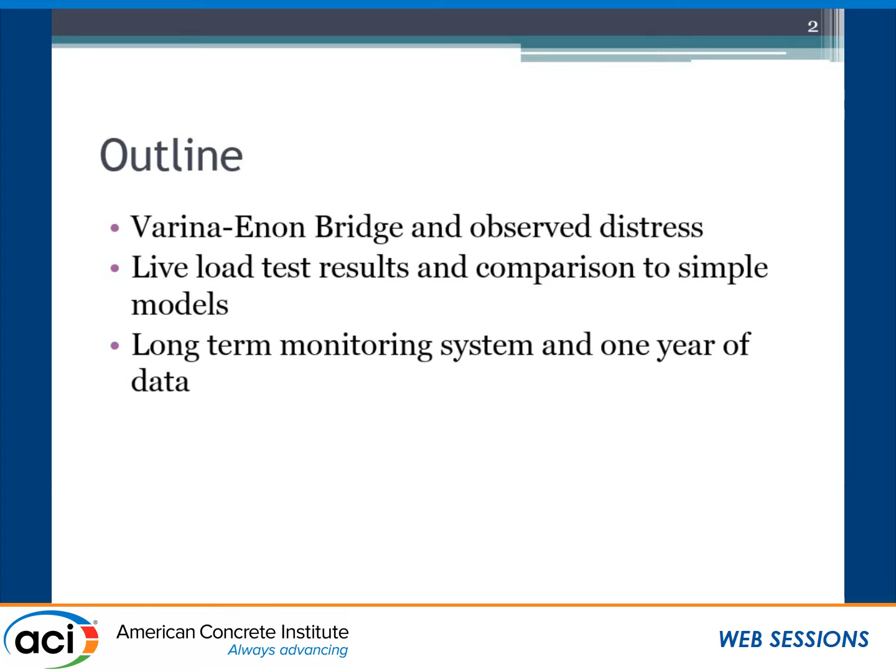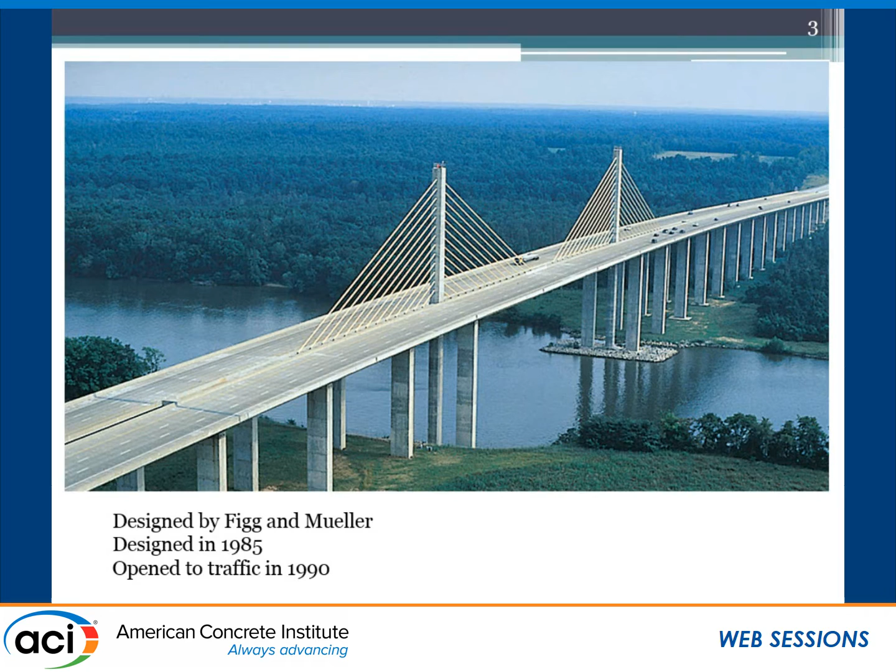So this is the Varina Enon Bridge. The main spans are a cable-stayed structure. The approaches are span-by-span constructed segmental box girder units. It was designed by, at the time, Figg and Mueller back in 1985, and it was open to traffic in 1990. The area of interest of our research was actually the approach structure.

This is on the northbound side of the bridge, the southernmost approach unit. It has 6 150-foot spans, erected using span-by-span techniques with exclusively external post-tensioning.

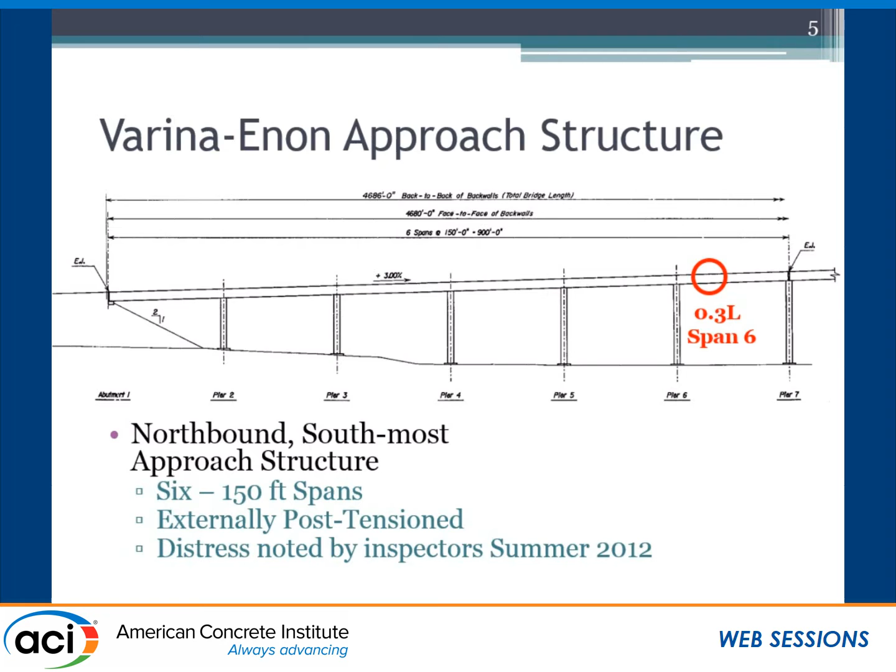The distress was noted by inspectors during a routine but detailed inspection in the summer of 2012. One location where they saw this distress was in span 6, about 3/10 of the span length away from the first interior pier. What they saw was that the joint between segment 2 and segment 3 in that span was opening under traffic. By their visual estimate, they reported it was opening 1/16 of an inch repeatedly under traffic loads.

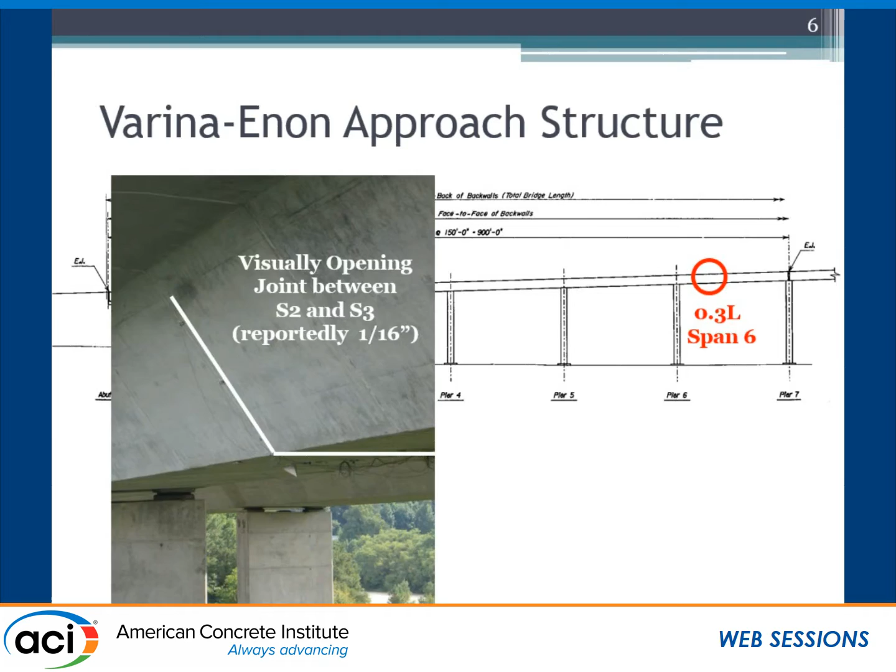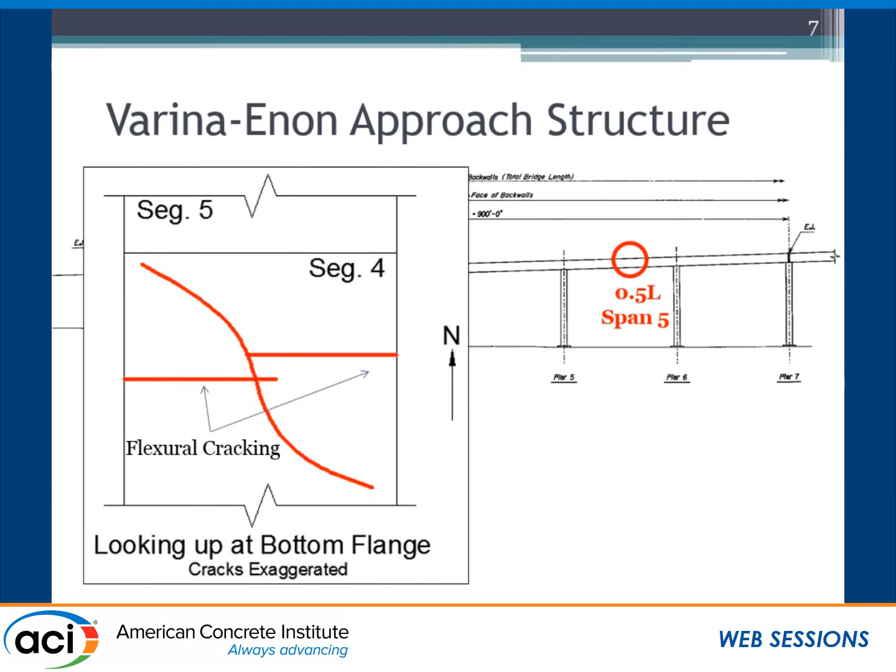There was also some distress noted in span 5, near the midspan in segment 4, and this distress was actually within the segment rather than at a joint. They noted flexural cracking and also a diagonal crack across the bottom. This led to us having discussions with VDOT to do some live load testing.

They had also hired Parsons Brinckerhoff to do some more detailed analysis of the structure to determine if this was really a major problem, an anomaly, or what was going on.

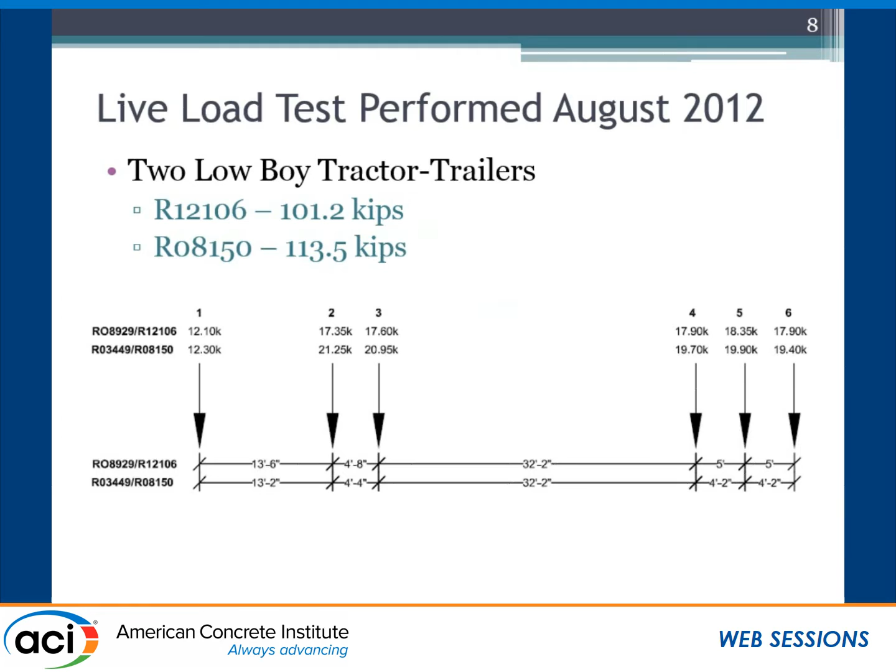Our testing was done with 2 lowboy tractor trailers, one weighing about 101 kips, the other about 114, and both had closely spaced rear axles around 60 kips.

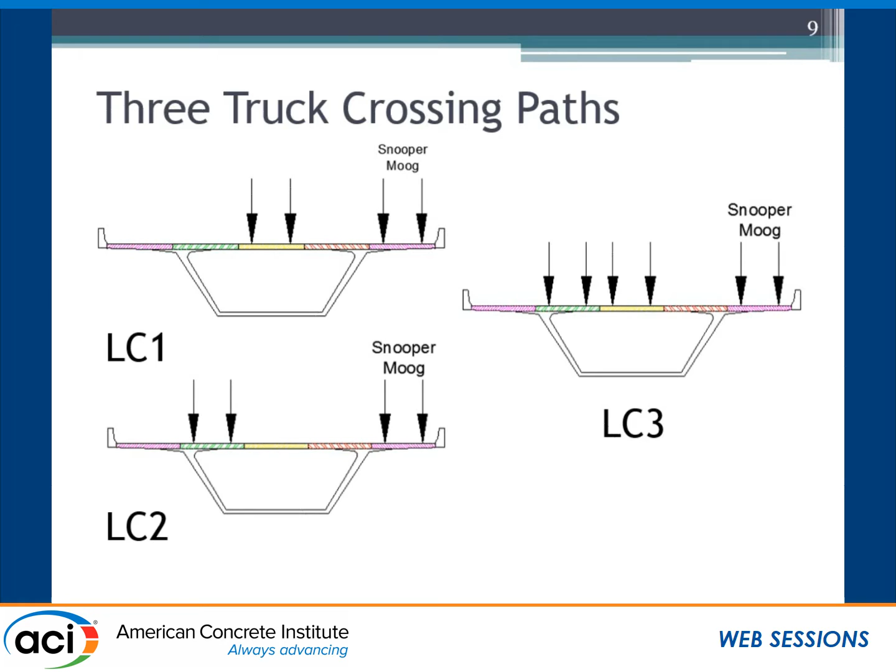We laid out some truck crossing paths. We had the shoulder and the right lane closed to traffic for our equipment and work. We had 2 trucks parked on the shoulder, a snooper and a moog, to help us place our instrumentation. For the truck crossings, one we rolled the trucks right across the center lane, one we rolled a single truck across the left lane, and then the third load case we rolled the trucks side by side in the adjacent lanes. To determine if our data made any sense, we did a very simplified beamline analysis.

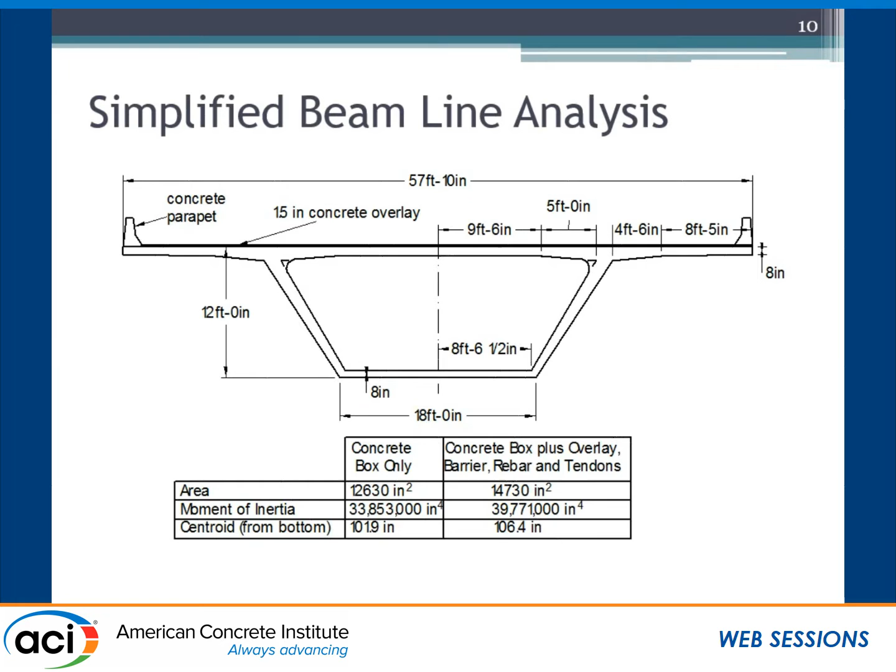This is the cross-section of the approach spans, almost 58 feet wide, 18 feet at the bottom of the box, 12 feet deep. We threw in everything but the kitchen sink in estimating a stiffness, including the concrete box plus the 1.5-inch overlay plus the barrier rails plus transformed cross-sections of the rebar and the tendons. This gave us the cross-sectional area and moment of inertia used in our comparison analysis.

We found that the comparison was pretty good. Again, load case 1 and load case 2 - each load case we ran the trucks 2 times to make sure our data was consistent. Our calculated deflections were within 1/1000th of an inch in each case, a couple thousandths of an inch in another, and actually, believe it or not, spot on for the double load case.

We also looked at some of the strain gauges that we had placed through the depth of the cross-section. We had them at the midspan of span 5, near the first interior support, and at the 0.4 L position on the exterior span. With these plots, I'm comparing 4 different instances.

The 2 truckload case, maximum positive and maximum negative moment at that location, and then the one truckload case, maximum positive and maximum negative strains at that location. In each case, the dotted line is always the analysis, and the solid line with the dots is the measurement.

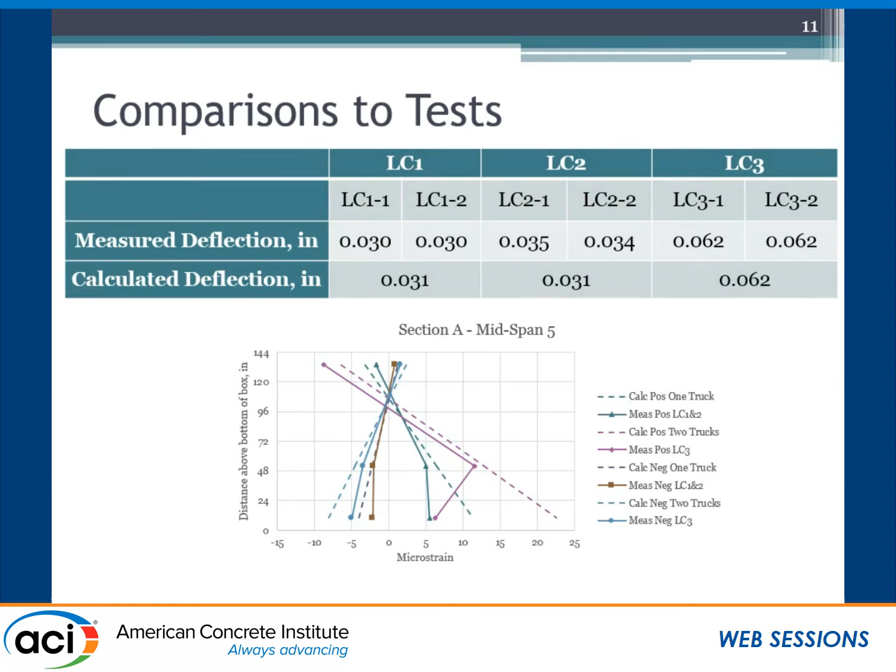We got pretty good results, especially with the upper gauges. The bottom slab gauge was a little different, which could be related to the proximity to the cracks. This is at the support where there was no cracking, and comparing the dashed line, which is the analysis, and the solid line, which is the measurements, we got very good correlation.

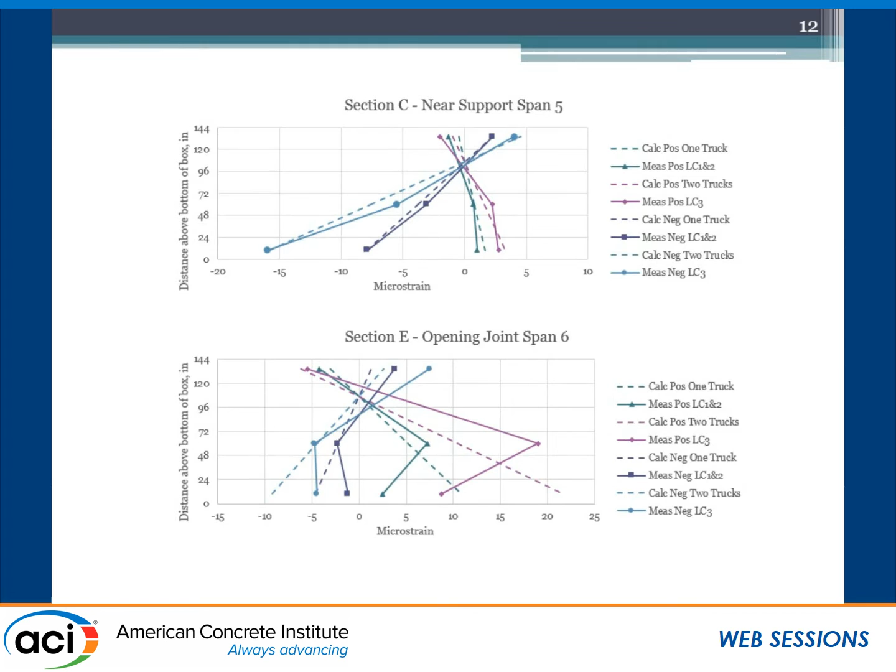This is near the opening joint, and again we got decent correlation near the top, but things were a little off at the bottom of the slab. At least our assumption is it's always instrument failure, but we believe it was due to the proximity to the joint.

So a recap of the live load test. The visual estimate by the inspectors was that it was opening a 1/16 of an inch under traffic, but I do want to note this was measured on June 29th of 2012. We looked at the weather station data from the airport, which is not too far from the bridge. On that day, it was 103 degrees Fahrenheit.

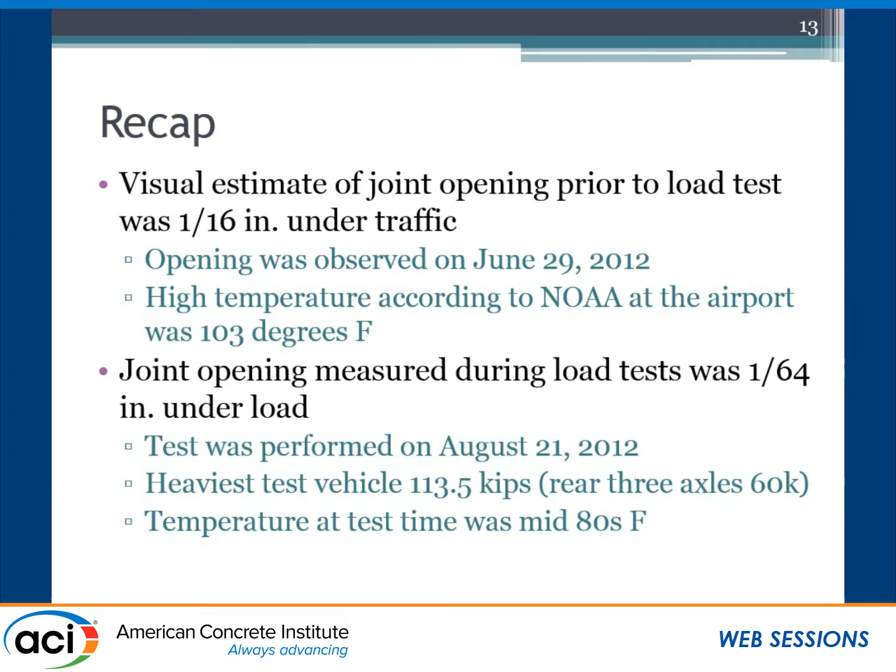Meanwhile, the day that we tested the bridge, we only got a joint opening of about a 1/64 of an inch, even with those two trucks of over 100,000 pounds each. But that was performed on August 21st of 2012, and the temperature at the time of testing was only in the 80s. This led us to believe that the excessive opening on the day the inspectors were there was due to thermal gradient issues.

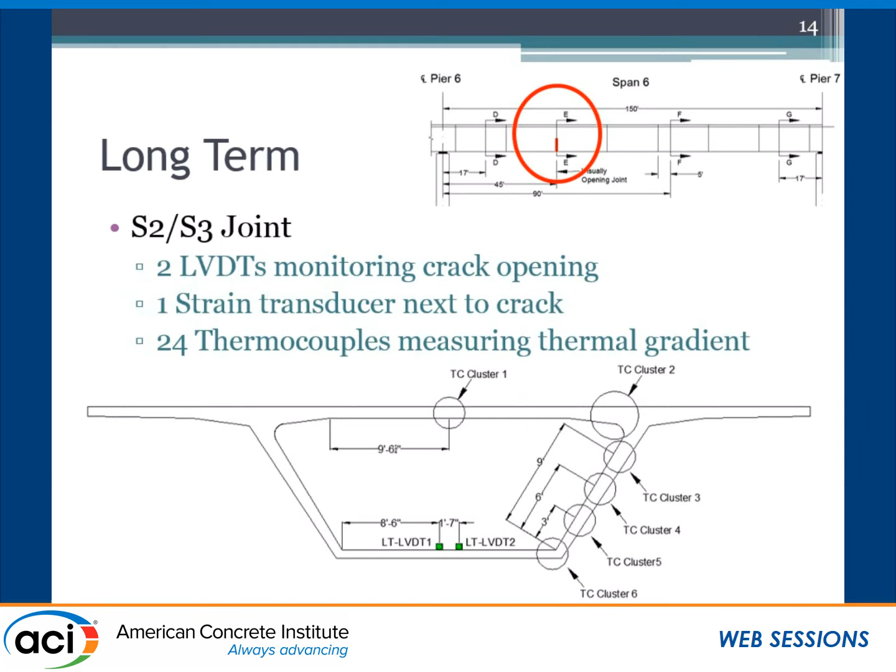So we established a long-term monitoring program to investigate that hypothesis. We instrumented very close to the joint that opened, between segment 2 and segment 3 on span 6. At that location, we put LVDTs across the joint to measure the joint opening. We also put thermocouples throughout the cross section to understand the thermal gradients, and we had a strain transducer immediately adjacent to the crack.

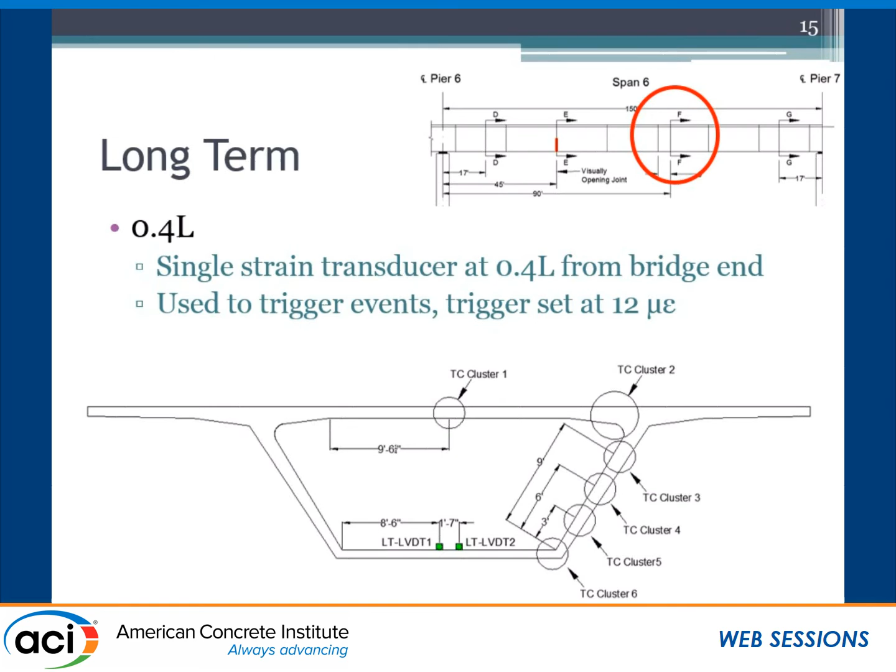We also put instruments at the 0.4 L of the end span, which should be the location of maximum moment under our truckloads. We had a single strain gauge on the bottom slab there, and used that as our triggering device. We let the long-term data acquisition run at about 50 hertz, and every time that gauge registered a strain of over 12 microstrain, it would record all of the data for a couple of seconds before and after that strain event.

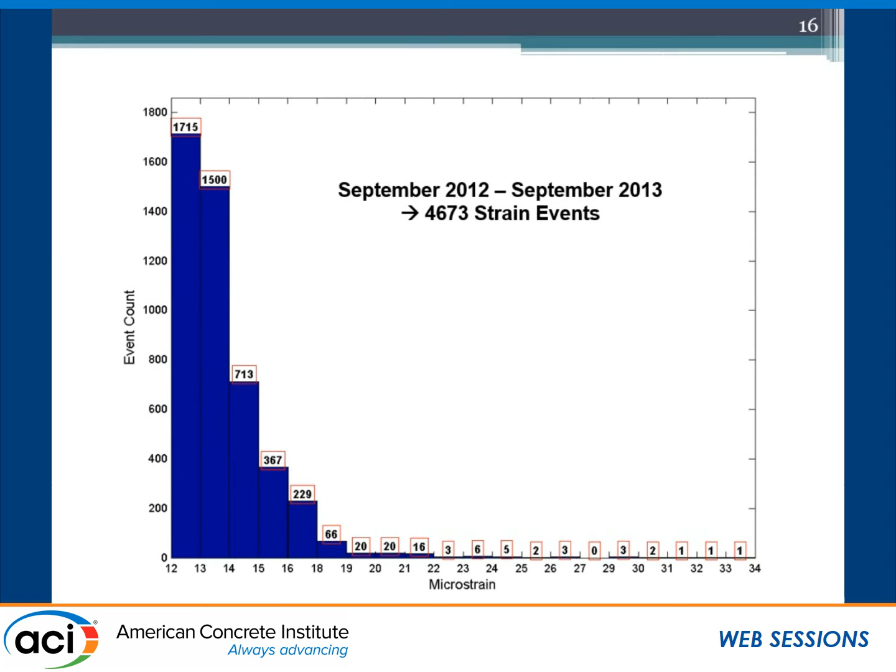If we look at the data collected from that triggered event between September 2012 and September 2013, we had 4,673 strain events that were over 12 microstrain, and this is our histogram. Most of them are pretty small, 12, 13, 14 microstrain, but we did have some all the way out to about 3 times our triggering level, so 34 microstrain.

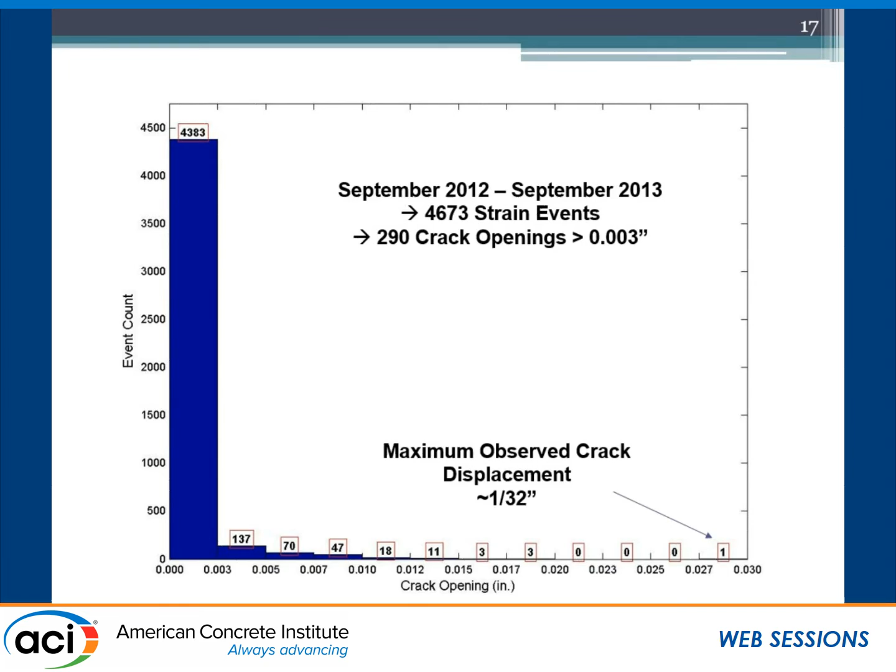Of those total 4,673 strain events, only 290 resulted in a crack opening measured by those LVDTs of greater than 0.003, and the biggest one we ever saw was a 32nd of an inch. So we're still not to where the inspectors estimated the crack opening to be, but again, it was our opinion that was because of the influence of the thermal gradient.

So we started looking at our data a little bit differently to try to sort out the influence of the thermal gradient, recognizing the thermal gradient currently in AASHTO is a nonlinear gradient with a maximum differential between the top of the deck and the web of 41 degrees Fahrenheit. The actual design of this bridge was done with a linear gradient with a maximum difference from top to bottom of the structure of 9 degrees Fahrenheit.

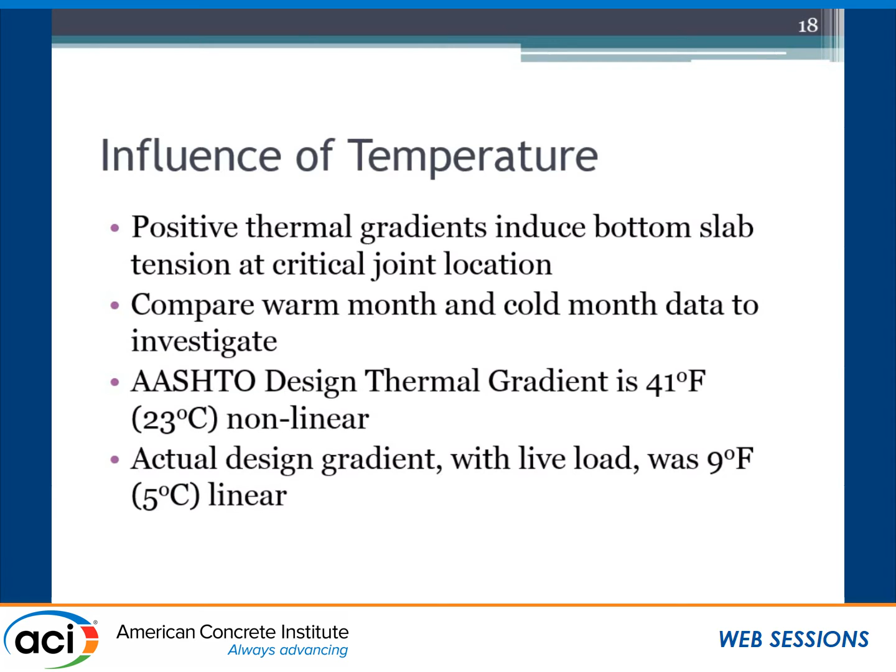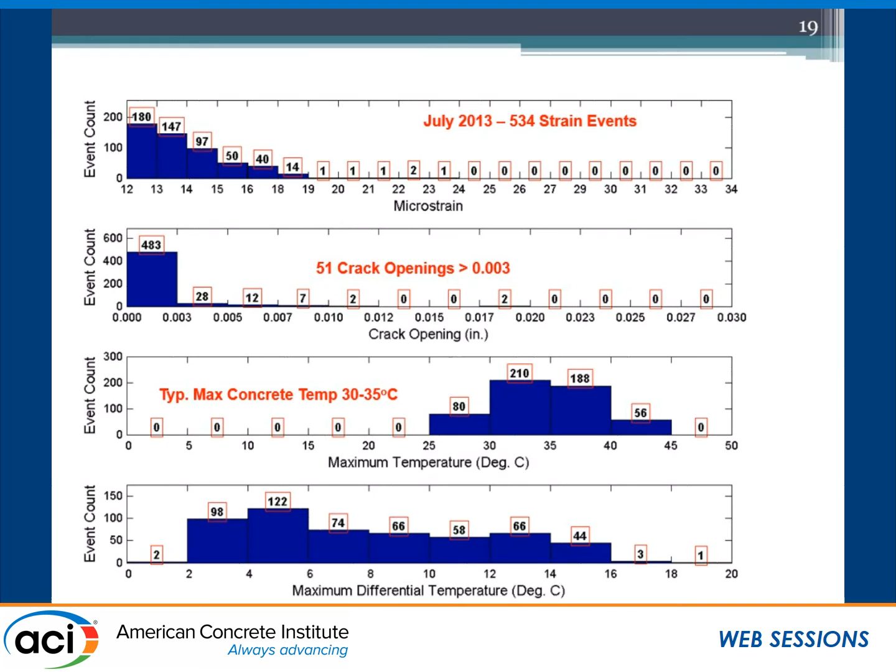So we're going to compare 2 different months of data. July of 2013: 534 strain events, 51 crack openings greater than 0.003. Typical maximum concrete temperature, top of the deck, was between 30 and 35 degrees Celsius, and the differential between the warmest location in the slab and the coolest location in the web was up to 16 or 18 degrees Celsius.

We look at a different month, a cold month of December 2012: 277 strain events with no crack openings greater than 0.003, even though some of those strain events were pretty large. Typical concrete temperature down in the 5 to 10 degrees Celsius, and typical differentials only 2 to 4 degrees. So this is, again, just reinforcing our hypothesis that the thermal gradient is making a big difference in whether or not the crack opens up.

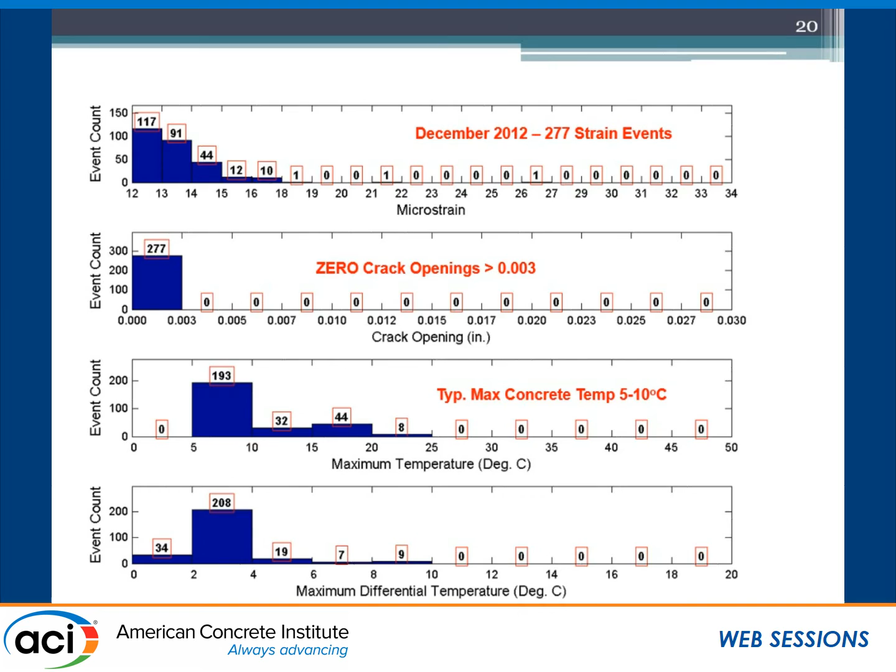Another comparison, I'll drive you crazy with my comparisons. We're going to look at 2 events on the same day, same magnitude triggering event, but one of them in

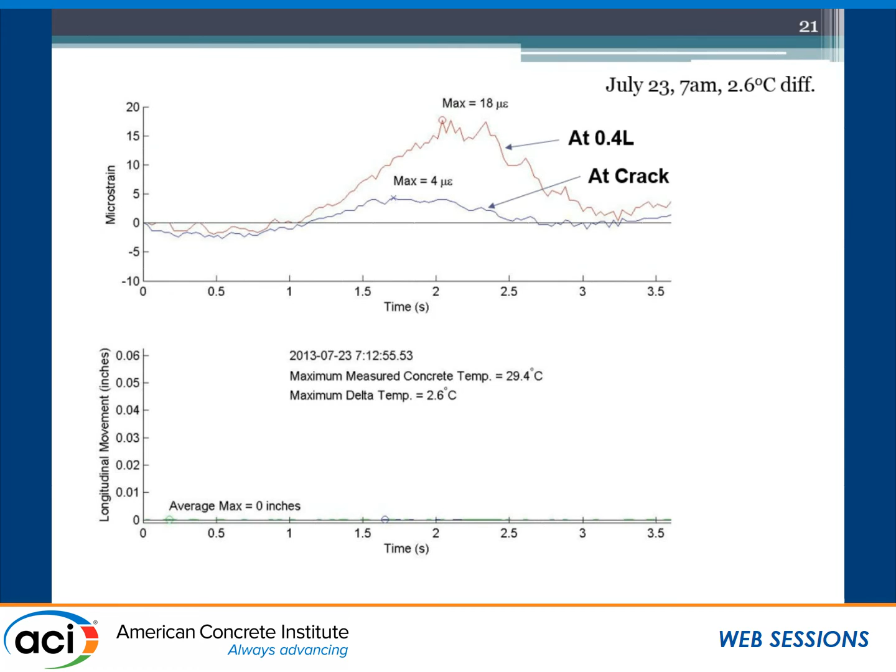the morning, so this is when the differential is going to be the smallest. It was only 2.6 degrees Celsius. We had an 18 microstrain triggering event. The strain gauge at our crack measured a maximum of 4 microstrain, and we saw no evidence of the crack opening at all. Now we move to the same day.

Now we're 3 o'clock in the afternoon. We have an almost 15 degrees Celsius differential. Same level of triggering event, 18 microstrain. And now this difference isn't much, but I want to talk about that. 6 microstrain, but we definitely see the crack opening to about 1/100th of an inch.

And the interesting thing is we see this plateauing of the microstrain immediately adjacent to the crack. And you can see that that corresponds almost exactly to the opening and the closing of the crack. So once the crack opens, that strain isn't going to increase anymore because there can't be any additional tension transferred

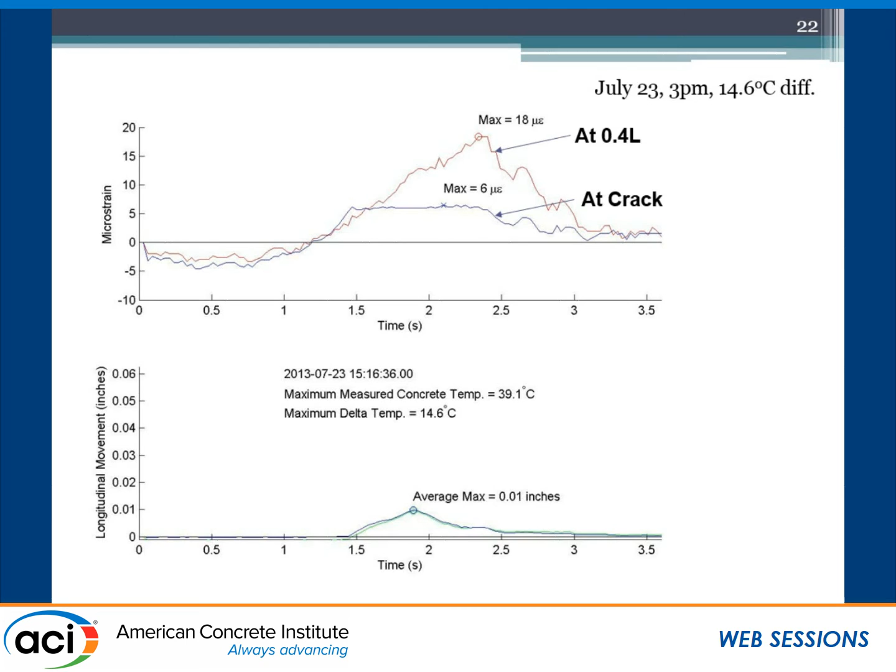across the crack. Last comparison. This is all of our triggered events, and now we have the crack displacement on the vertical axis and the strain at the triggering location on the horizontal axis, and the dots are related to, and this is actually the

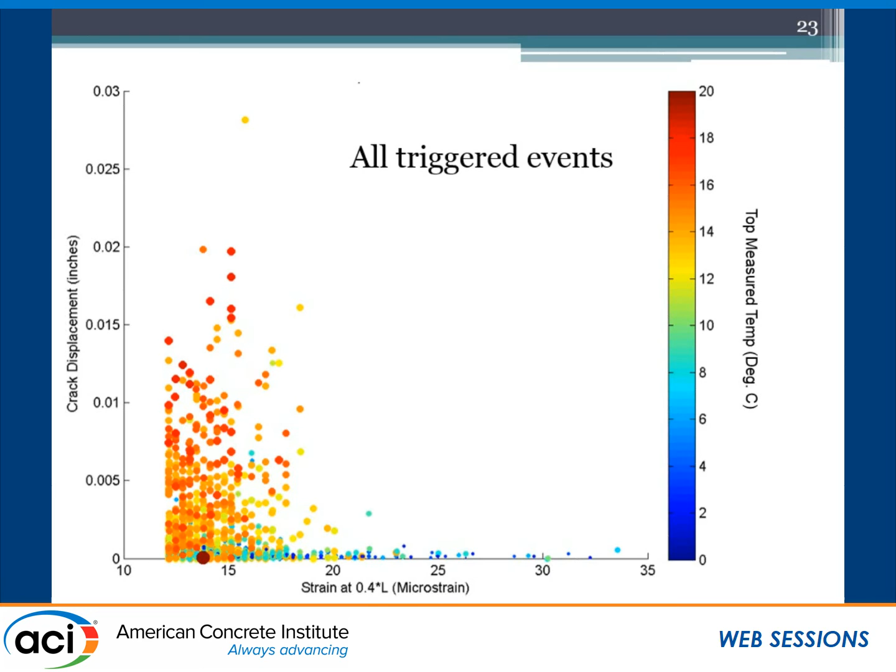differential, not the maximum temperature at the top. So you can definitely see that when those temperature differentials are high, even a small strain event will make the crack open, but when the temperature differential is small, a very large strain event will cause no crack opening at all. And one more time, there's July, there's December.

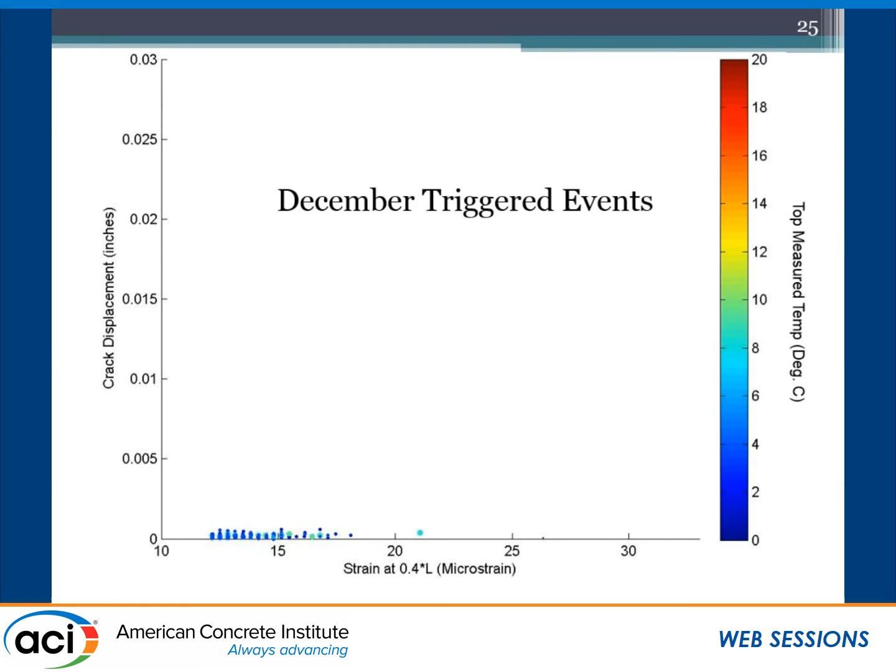We decided that our hypothesis was good, but the next thing we really wanted to look at was why that joint? Why was it happening right there? So we did a simplified long-term analysis.

This was built segmentally, span by span, and so the original system is different than the final system. So we did just a simplified analysis saying, well, the final distribution of moments within the system is going to be a weighted average of the initial moment distribution times e to the minus phi, where phi is our creep coefficient, plus the final configuration as if it had all been built in its final configuration from the start, times 1 minus e to the minus phi.

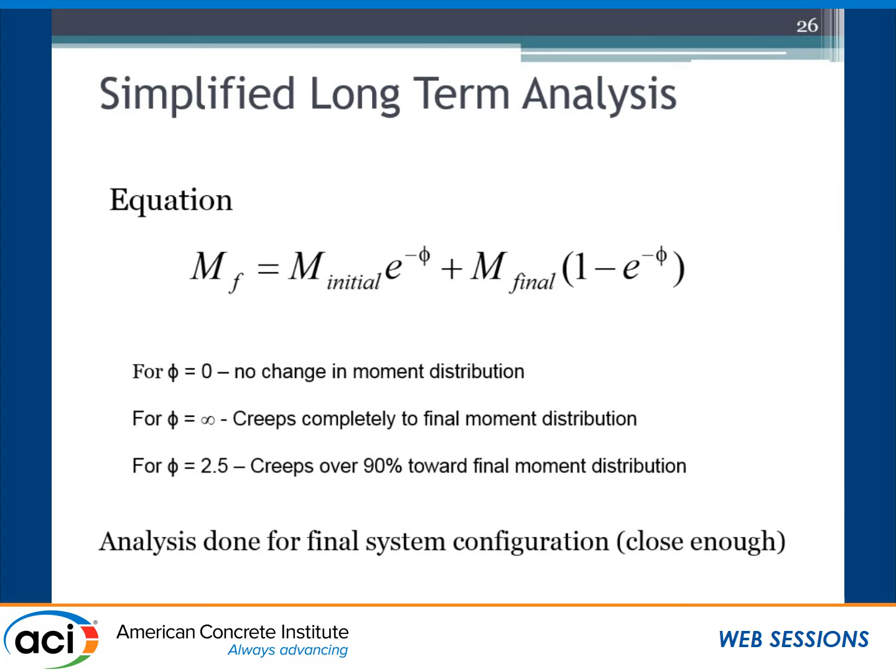So again, if creep was 0, it would just stay in its initial configuration. If creep were infinite, it would creep all the way to its final configuration. If you use a creep coefficient of about 2.5, it's creeping about 90% of the way there. So I said, we'll keep it easy and we'll use the moment distribution from the final configuration.

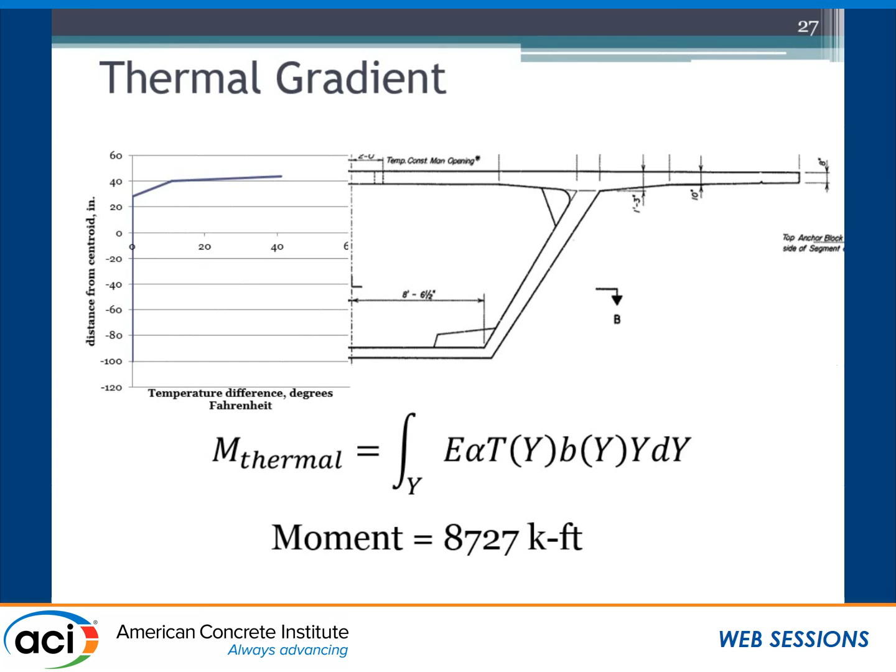We also looked at the thermal gradient as currently presented in AASHTO, which again is a 41-degree differential between the hottest point in the top slab and the coolest point in the web. And so here are all of the different moments acting on the bridge.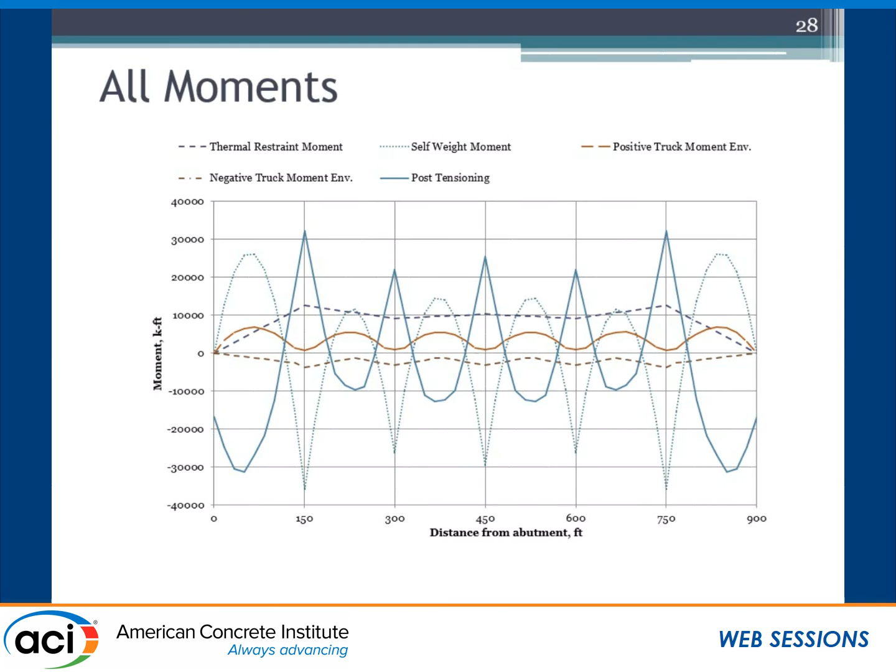And here's the positive restraint moment from thermal gradients. So you can see it's twice the live load moment. So they're pretty significant. So if I sum them all up, this one is just dead load plus post-tensioning, which again is right around 0, which is awesome.

Here I've added in the thermal gradient, so that bumps it up quite a bit. And here I've added in the positive live load moments. This is where our crack was opening at one of the higher points on this final moment diagram, and that's the point where the segment cracked.

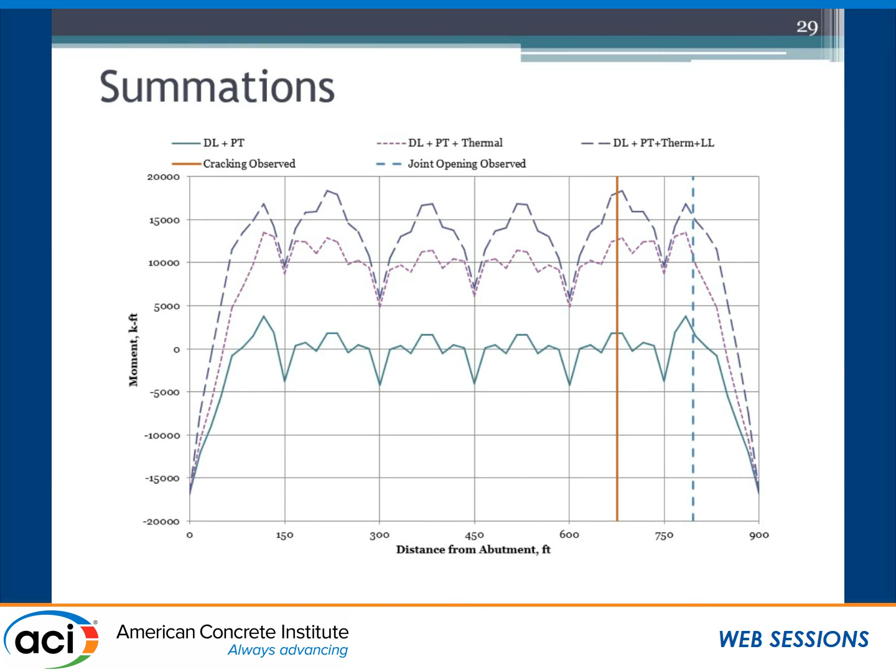So it led us to believe that, okay, so it makes sense that that was where we saw the distress in the structure. The remaining question, though, is, well, why not here and here and here and here and here? We don't know.

But in summary, the maximum joint movement during the live load test was a 64th of an inch. That was less than what was observed by the inspectors. Maximum that we measured over the 1-year period was a 32nd of an inch, but again, we never saw a gradient as high as what we think was present on the day that the inspectors were on the job site.

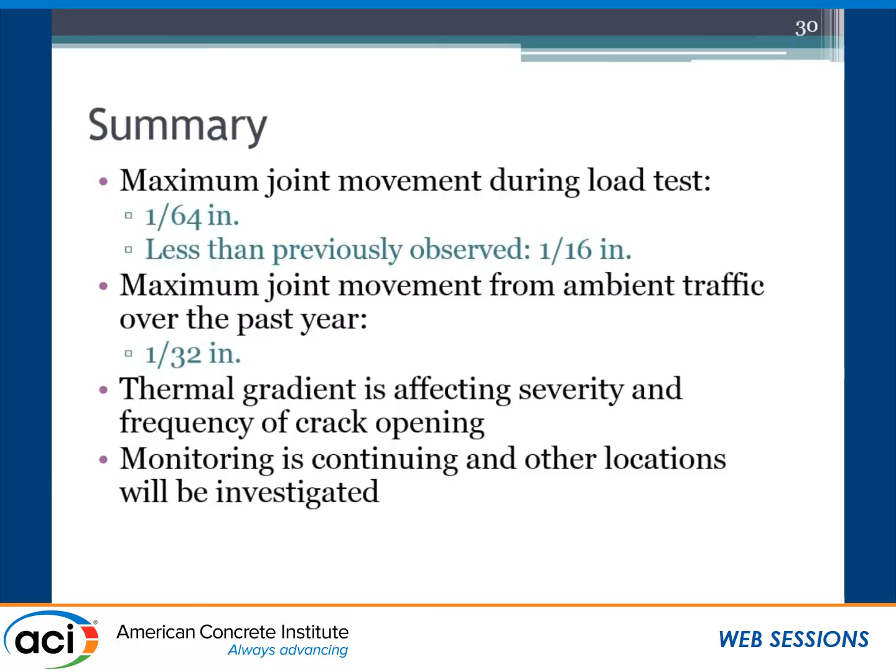The thermal gradient is definitely affecting the severity and the frequency of the crack openings, and we're continuing to monitor and investigate this structure to learn some other things about the bridge, but to ensure that this type of crack opening is not going to be a long-term problem.